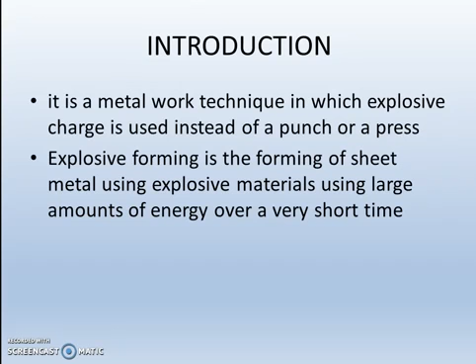It is a metal work technique in which an explosive charge is used instead of a punch or a press. Explosive forming is the forming of sheet metal using explosive materials, using large amounts of energy over a very short time.

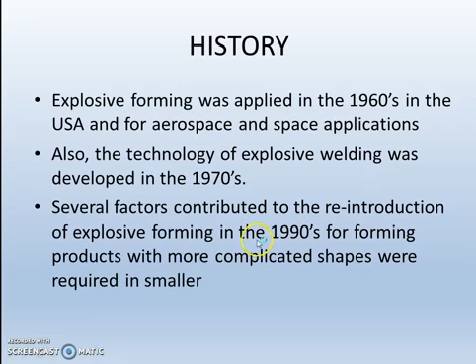The history of explosive forming. Explosive forming was applied in the 1960s in the USA for aerospace and space applications. Also, the technology of explosive welding was developed in the 1970s. Several factors contributed to the reintroduction of explosive forming in the 1990s. Products with more complicated shapes were required in smaller quantities.

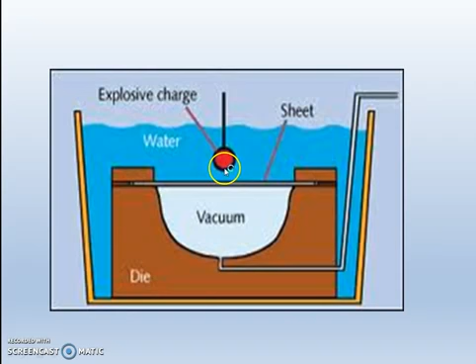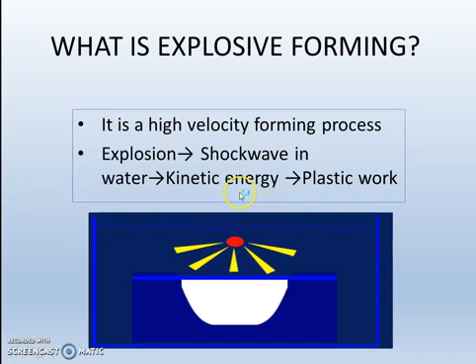This is a diagram of explosive forming. Here is an explosive charge, and it is immersed in water, and here is a blank sheet. Under this there is vacuum, and the explosive charge is detonated. High energy, high velocity shock waves are formed, which will deform the sheet. It is a high velocity forming process. The explosion leads to shock waves in water, very high kinetic energy waves, which will cause plastic deformation of this workpiece.

A metal sheet is placed on a die. The die cavity is vacuumed and the assembly is placed in water. An explosive charge is detonated under water, pushing the sheet into the die in about 2 milliseconds. It's a very rapid process.

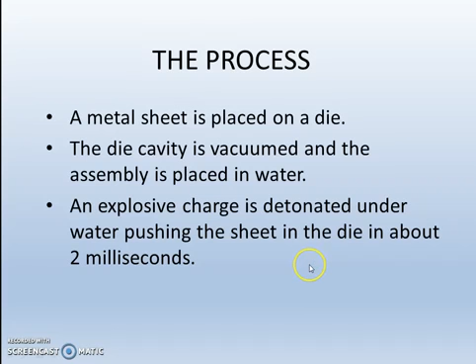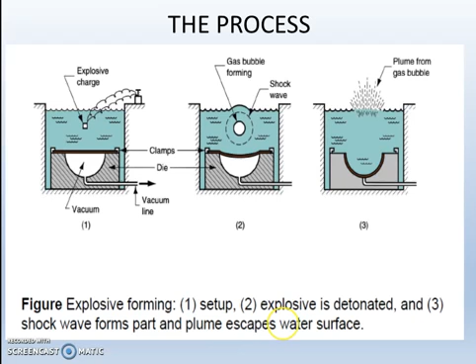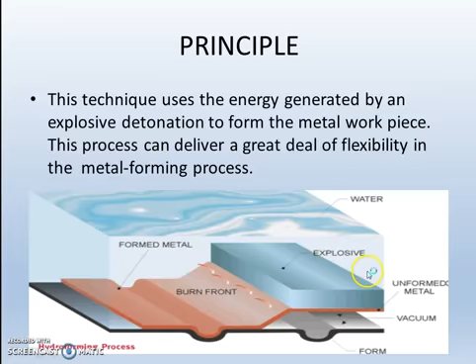The principle of operation of explosive forming. This technique uses the energy generated by an explosive detonation to form the metal workpiece. This process can deliver a great deal of flexibility in the metal forming process. There are two methods of explosive forming, classified based on the position of the explosive charge relative to the workpiece: the standoff method and the contact method.

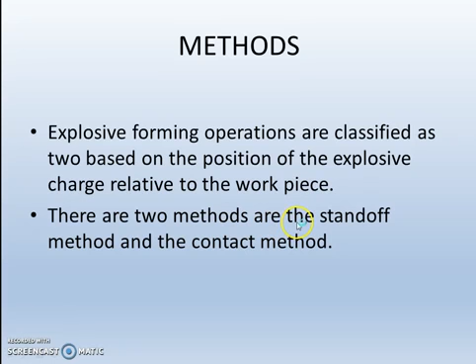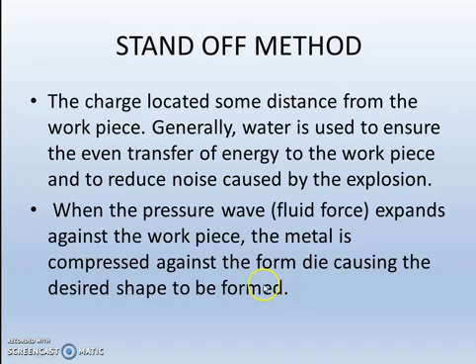In the standoff method, the charge is located some distance from the workpiece. Generally, water is used to ensure the even transfer of energy to the workpiece and to reduce noise caused by the explosion. When the pressure wave or fluid force expands against the workpiece, the metal is compressed against the forming die, causing the desired shape to be formed.

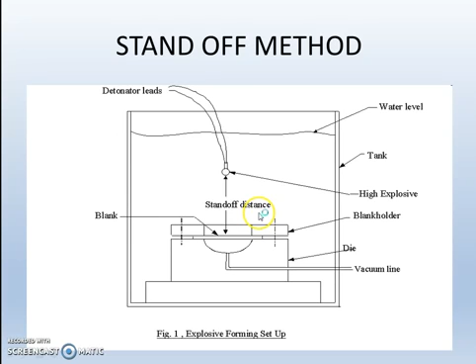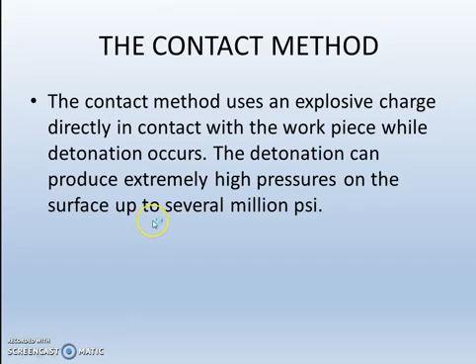This is a setup of the standoff method. Here the explosive device is placed at a standoff distance from the blank holder, and the total setup is placed inside water. The other is the contact method. The contact method uses an explosive charge directly in contact with the workpiece while detonation occurs. Detonation can produce extremely high pressures on the surface, up to several million psi.

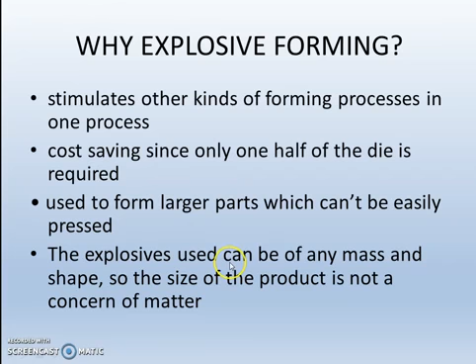Why is explosive forming used? It simulates other kinds of forming processes in one process. Cost saving, since only one half of the die is required. Used to form larger parts which can't be easily pressed. The explosives used can be of any mass and shape, so the size of the product is not a concern.

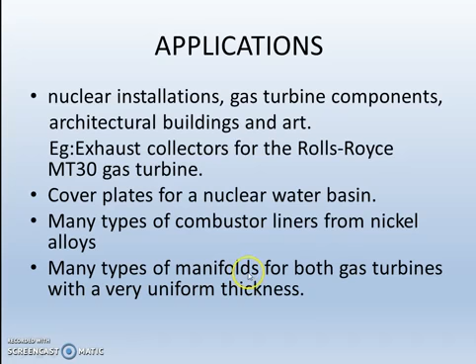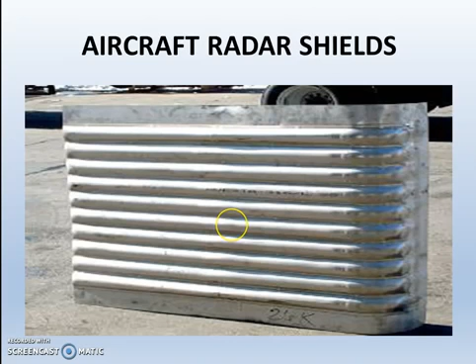The applications of explosive forming. The major applications are nuclear installations, gas turbine components, architectural buildings, and art. Examples: exhaust collectors for the Rolls-Royce MT-30 gas turbine, cover plates for a nuclear water basin, many types of combustor liners from nickel alloys, many types of manifolds for gas turbines with a very uniform thickness, boiler products, missile parts, and aircraft radar shields. These are the applications.